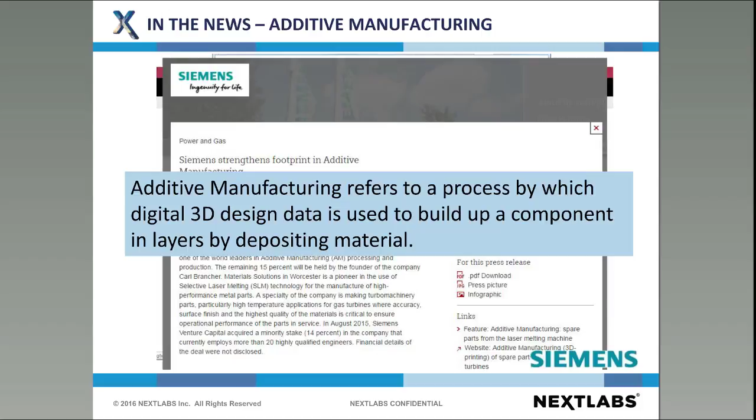Additive technologies like 3D printing are just one of the latest twists on manufacturing in this space, and it's an area Siemens are heavily investing in, strengthening our footprint, as you can see from a recent press release. To sum up additive manufacturing: it refers to a process by which digital 3D design data is used to build up layers by depositing material. When we talk about 3D design data, we mean 3D CAD, simulation, manufacturing—a very broad set of data.

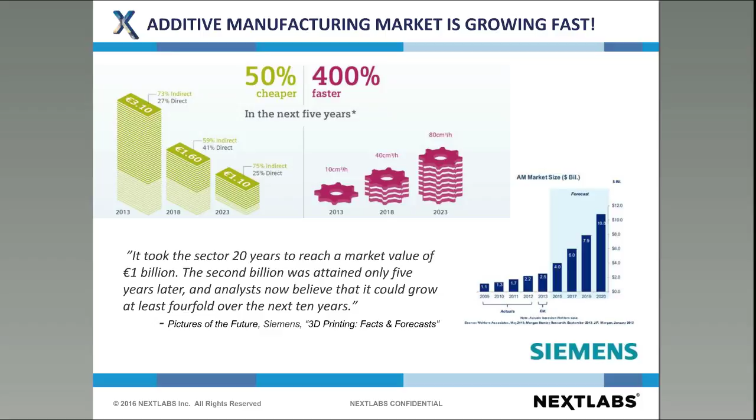The market for additive manufacturing is forecast to grow exponentially over the next 5 years. Some of the drivers: manufacturing becomes cheaper and faster, just as cheaper bandwidth allows us to stream videos on Netflix today, and look at how hardware has revolutionized the cloud—services like Amazon Web Services. These are some of the trends driving real exponential growth in the digital manufacturing enterprise, amounting to a paradigm shift.

What we're seeing within Industry 4.0, looking at the Internet of Things, is data traveling further, connected in ways not possible before. We look at big data and analytics—we're able to interpret and analyze data like never before. Data is the key. We have a digital thread that moves all the way through design to manufacturing, and data becomes the real driver for the whole process.

As you can see from another press release, the investments Siemens are making in this area are yielding a new set of additive manufacturing end-to-end solutions, including not only CAD but simulation, manufacturing, and entire platform support. Additive manufacturing represents a shift in the value chain—value no longer rests in the objects being produced, but in the design of an object, its digital definition. Ultimately, the CAD files now are more valuable than the end product itself.

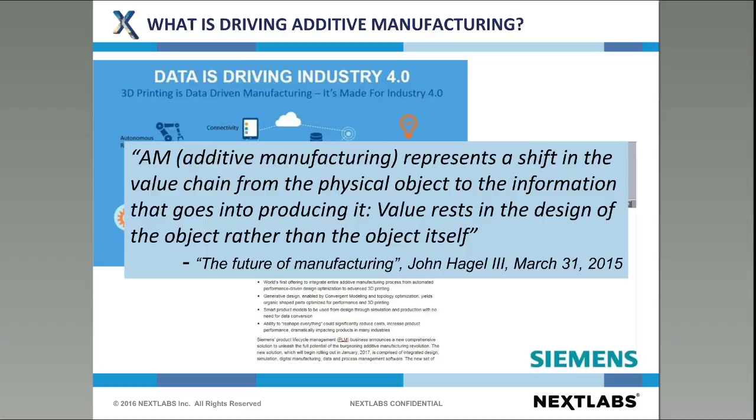So why is EDRM so important? What really is driving this? Well, let's look at a real-world example. If we look at this car, we go from concept through 3D printout to final product. Roughly 75% of this car is 3D printed, and nearly all of the chassis, the panels you see here, are 3D printed. Very shortly, we'll be looking at up to 90% of the car being 3D printed, and to put that into context, they went from design to concept in a little over 2 months.

Siemens deals with the end-to-end process with data being managed by Teamcenter. Files are protected both at rest and in motion. We provide world-class access to files within the environment.

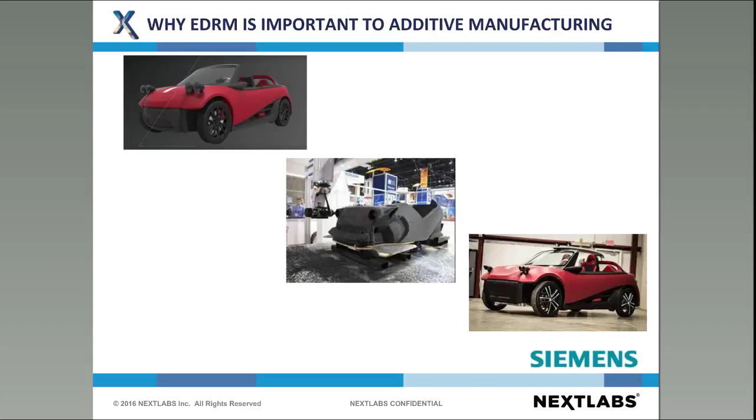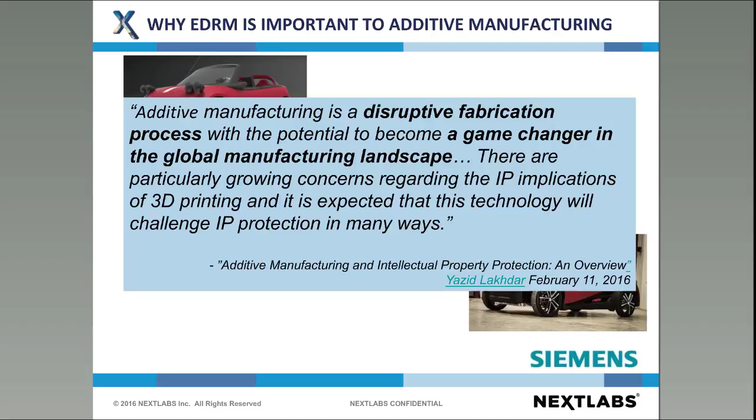Additive manufacturing is becoming a game changer, especially as our data needs to travel further. And the biggest concern here is IP protection with 3D printing. Protecting against data hacking or stealing your data, your intellectual property is becoming a real critical priority.

The challenge itself is protecting the data so you don't lose it. The data is the value. As I mentioned earlier, we have the use of CAD, simulation, and various manufacturing applications. We can derive stereolithography definition from our CAD, and we use intermediate formats like STEP. This is where all the real crucial value is in our data.

So, having said all of that, why the Siemens and NextLabs partnership? Siemens and NextLabs came together in a partnership to provide an end-to-end solution to address the very challenges I've been discussing here: securing our digital design definition in all its guises and protecting your IP. We automate the applying and managing of the DRM itself within Teamcenter, and we start to remove the manual processes that we see users using to protect the data.

Now, this in itself is a risk. So key to enabling secure collaboration is another key factor: the system should not become a barrier. And this really allows you to have confidence that your data is protected no matter where it goes or with whom, whether it's within your company or outside.

We support protecting data within Teamcenter, what we know as at rest, as well as when a file, for example, is shared outside of Teamcenter. Somebody puts it on a thumb drive, it's emailed, for example. This is what we call in motion, where we continue to provide that level of protection.

So having said all of this, I'm now going to hand you over to Bill Armstrong from NextLabs, who's going to take you through some of the use case scenarios and a demonstration. Okay, thank you, Guy.

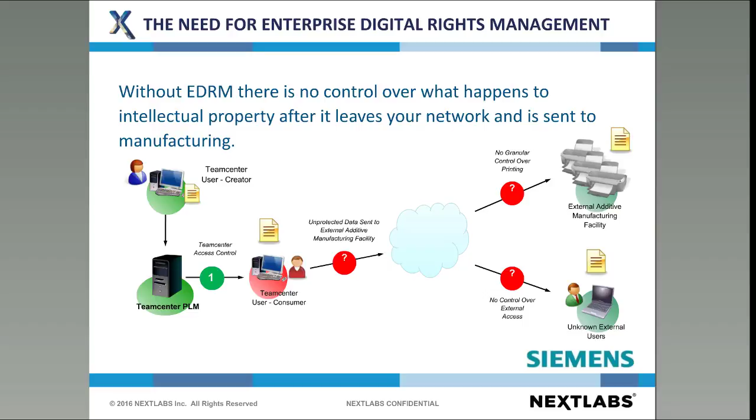So how do we resolve these types of issues? And so that's going to be with EDRM. With EDRM, we can control what happens to our IP and how it's consumed after it's been shared, or in this case, after it's been sent to manufacturing. So same use case: user creates IP, uploads it to Teamcenter. It's then downloaded, so this is actually a protected file now.

And when it's sent to manufacturing, we now have controls over being able to protect, do things like control how many of a certain item has been manufactured. So we have those types of controls to expire access to files. We make sure that data is not shared with another third party, that the design is not being manufactured for another company. We now have full protection over it.

And that's also the same scenario where we can control data when it's shared with a third party, with an unknown user in this case. So we make sure our IP is protected from end to end, whether it's sent to manufacturing or shared with suppliers or another company we're collaborating with. So we'll look at a demonstration.

Just to reiterate, NextLabs protects IP through the design and manufacturing processes. The combination of NextLabs and Siemens Teamcenter, we're the only company that can make sure that data is protected through both processes. Some of the design process risks are accidental data leakage, somebody accidentally sharing data with a third party they're not supposed to, insider threats, a user downloading IP and sharing it with a third party they're not supposed to, data being shared with partners without control over that after the fact. That's all during the design process.

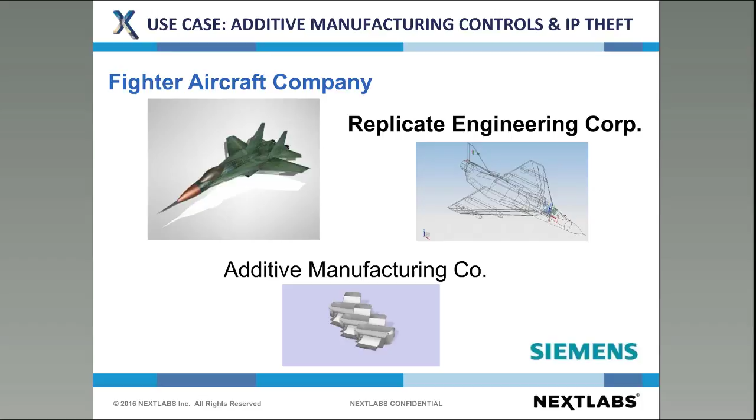In the first case, we're talking about design process collaboration, so protecting the data through the design process. Sally is creating IP, uploading it to Teamcenter, and Joe is downloading it and sharing it. So Sally's going to log into Teamcenter, view the file. In this case, we're looking at the design, an aircraft part, similar to the scenario illustrated.

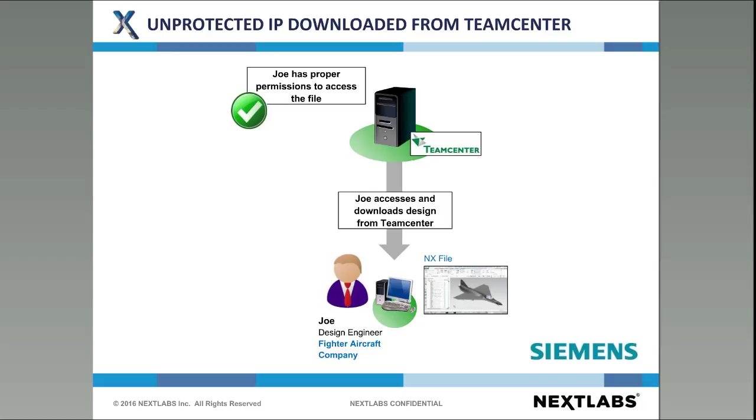And then in this case, since the data is not protected, Joe accesses and downloads this design from Teamcenter. We now have an unprotected file that's outside of Teamcenter, outside of our network, that could now be shared. We have no control over that.

So Joe's downloading the file in this case, saving it, and then transferring it. You might transfer it through, say, external storage, and he's sending this data to our competitor in this case. We have no control over this IP. We don't know what's happened to it.

Now, especially in the case with additive manufacturing, it's really easy for our competitor to start producing this item. They just have to send it to manufacturing. With additive manufacturing, the barrier is far lower to be able to start actually producing these items.

Which means it's even more important to be able to protect our IP with these advances in manufacturing technology. Same idea, so this is another use case where this is protecting the data during the manufacturing process. Unprotected data, unprotected design sent to manufacturing.

Same case, Sally creates IP, uploads it to Teamcenter, although in this case, we're knowingly transferring it to the manufacturing facility for 3D printing. But in this case, we still don't have any controls because the file's not protected. So unprotected IP means no controls around printing and manufacturing, so we don't have any control over the number of items that are being printed.

Or manufactured. So they have unlimited printing capability. We don't have any control over that without protected files.

And then from there, the file can continue to be shared, so we don't have any control over what happens to our IP once it's actually sent to the facility. And also, access never expires. So once we have those files shared, we don't have any way to control what happens to them being able to expire access. So these two scenarios are great scenarios for EDRM and things that we can actually address through NextLabs EDRM and our integration with Siemens Teamcenter.

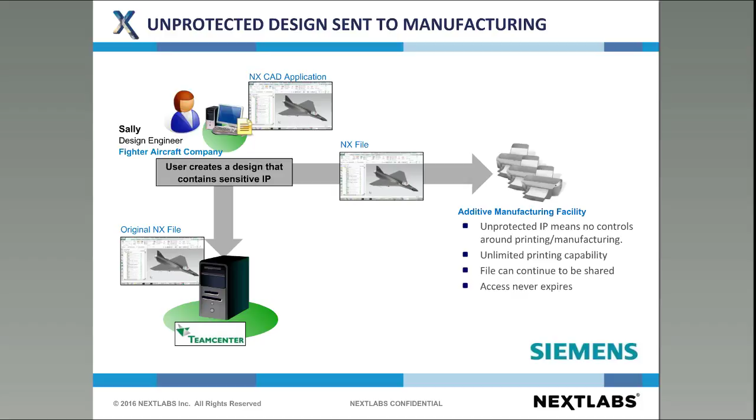So in this case, the confidential IP is leaked outside the company, so unauthorized third parties can now use this data to easily manufacture these designs without any need to reverse engineer. No constraints on manufacturing. Unmanaged, unprotected IP is a big risk. So we're going to address these cases.

So now we're going to look at that case with protected data. Sally is now going to create IP, upload a design that she's going to upload to Teamcenter. And now with NextLabs, we're actually going to send that data to be protected automatically.

So we're going to encrypt that data, rights protect it, and make sure that we have controls over that data downstream when it's shared, when it's sent to manufacturing, or when it's shared with third parties. So this data has now been encrypted, and then it's sent to manufacturing. We'll take a look at how this is affected.

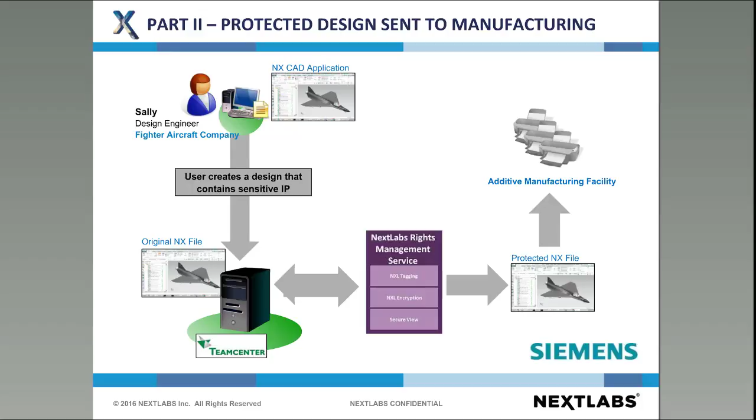So this is the demo where Sally logs in, views the IP, and then in this case, we're actually going to protect that file. There's a couple different ways to do it. We can automatically protect that file, or in this case, Sally is going to manually protect that file. So she's going to right-click on the file in Teamcenter and protect it.

So this is going to encrypt that data. And then so we can see now that the data has been encrypted. And then now she's going to download that design and send it to manufacturing.

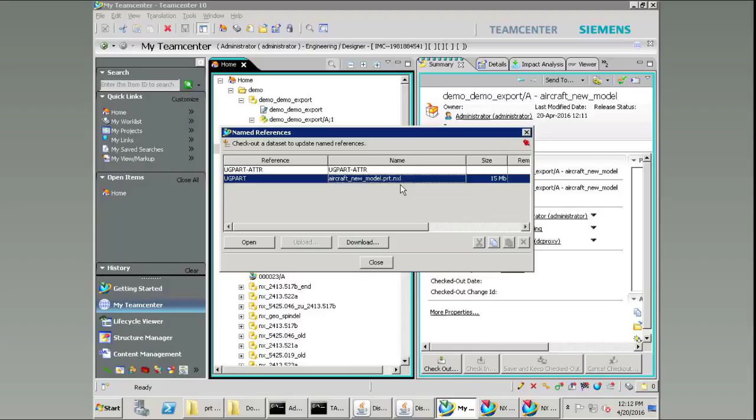So she downloads the file. This is now the protected design. And when we look at the protected file, we can actually see some of the properties that we're going to be using to control access to this data through policies. So some of the things that follow the file to make sure that this data remains protected.

So we can see the IP owner. In this case, that's the fighter aircraft company, the company that actually created the IP, the name of the design. In this case, we're going to allow a specific manufacturer to be able to print this design. So we're giving this manufacturer the capability to manufacture this design, but we now have some controls in place.

So we're going to make sure that access to this design expires January 1st of 2017. So we make sure that once this date hits, no one can open this file, no one can manufacture it. It can't be shared with third parties. We don't have to be concerned about data leakage or data getting into the wrong hands because the file is protected.

We're actually going to put a manufacturing limit in this case also. So we're going to say that only 100 of this design can be printed. This helps us with monetizing the manufacturing process. So we make sure that only a specific amount of our design is being printed and that manufacturer can't print additional designs for third parties.

So this is another look at this, another use case. In the first case, we looked at what happens when a protected file is sent to manufacturing. In this case, we're talking about protected IP being leaked to a competitor. So same case where Joe has downloaded the file from Teamcenter to be shared with a third party.

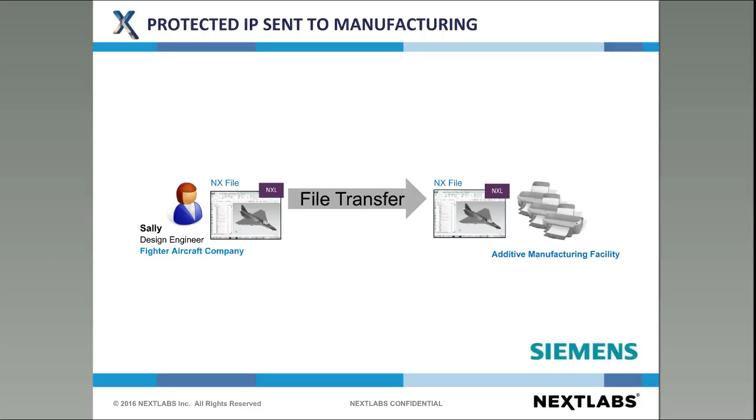The same process. So we're also going to look at the demo where we're actually sending the file to manufacturing. So in this case, we have the file that's now been downloaded from Teamcenter. So we go to our downloads. This is actually a file that's been shared with that third party. So either it's been sent to manufacturing or it's been sent to the third party.

They're downloading that file and they're going to try to actually view it offline after the file access has expired or after they've manufactured a certain number of that item. So we go into our files, we go to the downloads, try to view that protected design.

And then when we try to open up that file in NX or any application for that matter, we get access denied. So the rights protection is in place. So whenever an unauthorized third party tries to open up that file, they're going to get access denied because of the rights protection, because of the encryption.

Or in this case, the manufacturer tries to open up that file to print it past the allotted number of items there to manufacture or past the date that access is expired. And in this case, they get access denied.

So we make sure in this case that once a file has been protected in Teamcenter, we make sure that IP is protected downstream, no matter who it's been shared with, or also putting controls in place around manufacturing.

So our confidential IP is now protected. Unauthorized third parties cannot open or print the protected files. Protected files can only be opened by authorized users, such as the manufacturer that's been specified via the policy, unless access is expired. Access expiration could happen based on a date, or based on constraints on manufacturing.

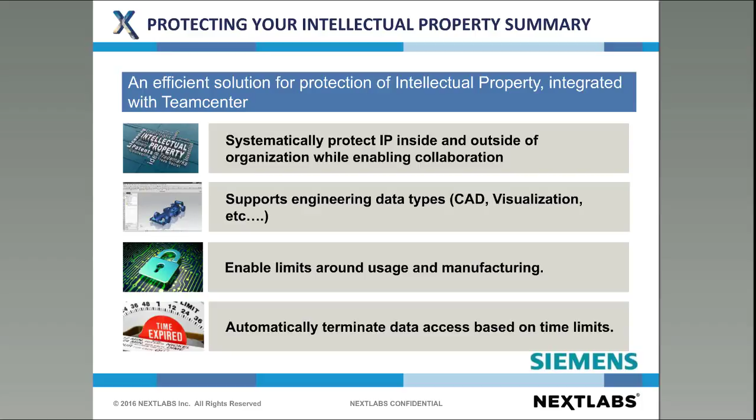Supports all engineering data types, so file type agnostic. We can support any type of data through our Teamcenter integration. The important one being able to enable limits around usage and manufacturing, so making sure that data access expires after our design's been manufactured, or being able to control how many of an item is being manufactured, and being able to terminate data access based on time limits.

So that's everything that we wanted to address via the demo. I think at this point we just wanted to open up the floor to questions.

Okay, thank you, Bill. We do have a couple of questions that came in. The first one is, how much data is typically lost when sending data to manufacturing? How big of a concern is this?

That's a very good question, and it's an extremely difficult one to quantify. Some of the reasons behind that are, if you look back to the Sony hack, they really did not want to tell anybody because of the impact to their company, how much of their back catalog, the titles in their catalog, had been stolen. So it is an extremely difficult one to quantify, and there are good reasons why there's no real quantification out there.

But I always like to look at it in a different way. If you consider that a competitor getting hold of your digital design definition files in another country, for your flagship product, if they can produce that and take 50% of your market share, that small number of files, you can very easily start to put a quantifiable value, a dollar amount, to what it means to your company.